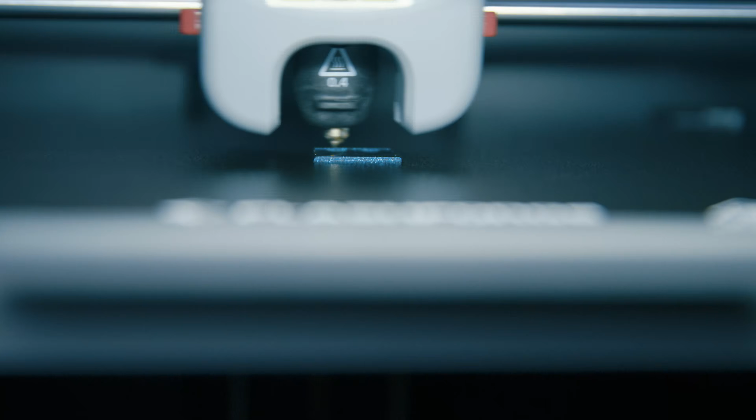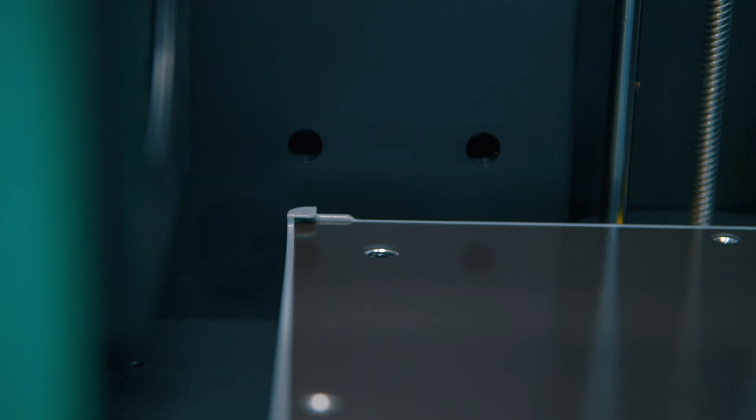It really is a great time to get into FDM printing, with all the brands releasing super fast and stable Core XY printers. The difficulty really is choosing between them, and within this size and form factor category. So if you'd already decided on maybe a P1P or a K1, let me muddy the waters further by asking you to consider a third option, because this one does some cool stuff and smart things to drive the technology forward.

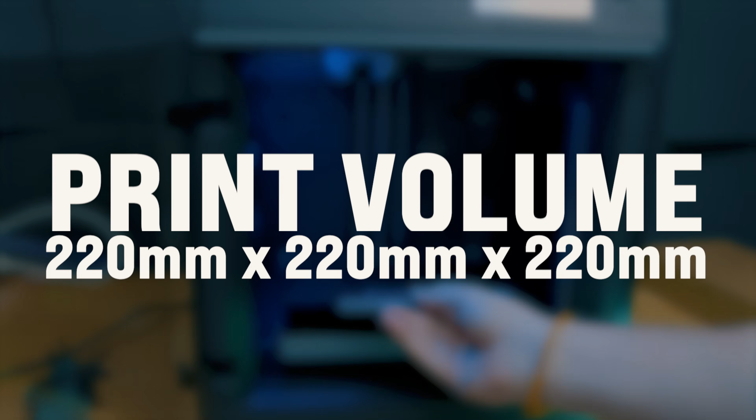Straight up, print-wise, this is solid once you get past the small hurdle, which I'll come onto shortly. But this is a really nice and tidy compact Core XY printer, and despite its size, it still has a 220mm cubed print volume, which comparably is the same as the Creality K1 in build area and just 3cm shorter in build height. It's a minimal difference.

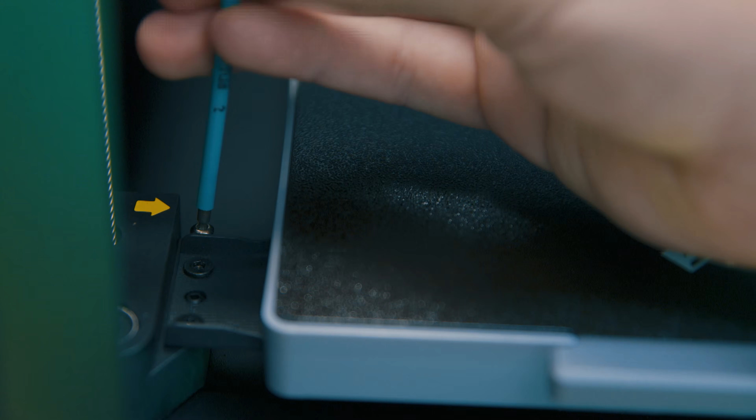Setup is simple, just take it out of the box, pull out the foam and undo the bolts securing the build plate. These are the ones with the bright yellow arrows pointing at them.

Now it's fast, but it's not the BS quick under 10-minute setup that they claim on the website, because even after all this and you turn it on, there's a 9-minute out of box calibration sequence. Though it's not like I can complain, considering I'm also guilty of misleading claims thanks to my clickbait thumbnails.

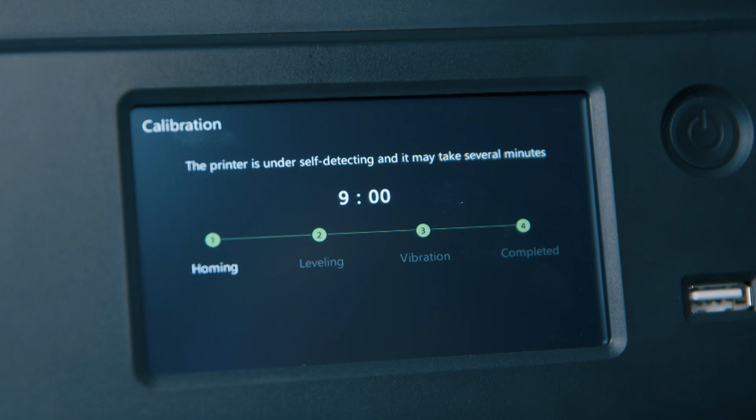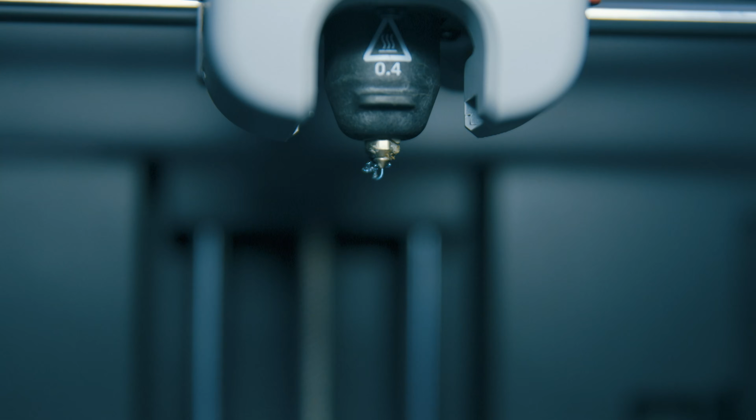Now in all honesty, the setup is pretty cool because it's straightforward and it does everything for you. Well, most of the important things anyway, such as leveling and vibration compensation. You just need to add the filament and you're ready to print.

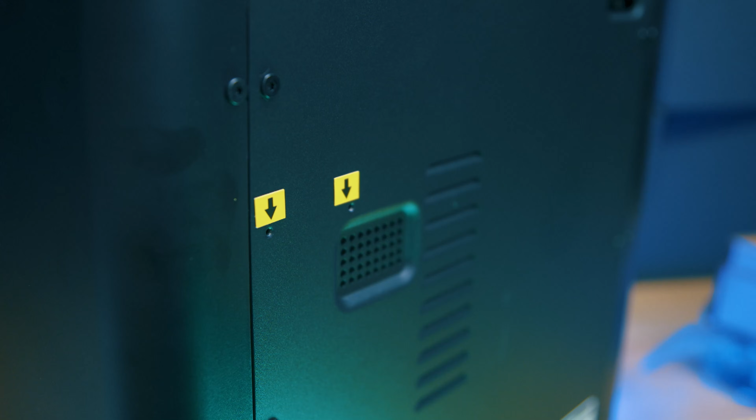And when it comes to filament, you get 250 grams with the printer, and they sent me this really nice titanium blue. I don't normally bother with the included filaments because they're too small, but this was too pretty not to use. Now when you load this in, Flashforge unfortunately have followed the irritating trend of having the spool holder on the back of the printer, and normally this means you need to have access to the back or spin the printer around every time you want to change it.

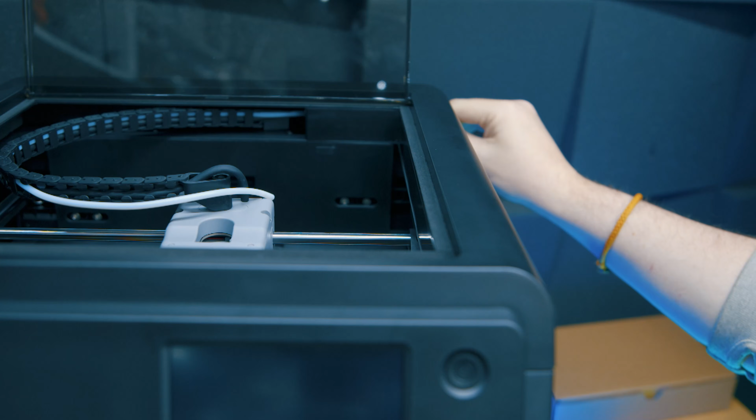But in this case they have left it so that the reel sits slightly proud at the rear and the PTFE tube sticks out of the edge, which means you can actually load filament into it with a generous reach around rather than having to go in from behind every time.

Other external features include the ports. You've got the power socket and rocker switch on the back, with the startup button next to the screen, that's sat on the front. And every time this starts up, because it kindly goes into sleep mode when it's not used for some time, you do get a funny little audio chime.

Also on the front next to the screen is the lone USB port, and I had hoped, thanks to the printer's rear Ethernet socket or built-in Wi-Fi capability, that I wouldn't need to use this, but I'll get onto that in a minute.

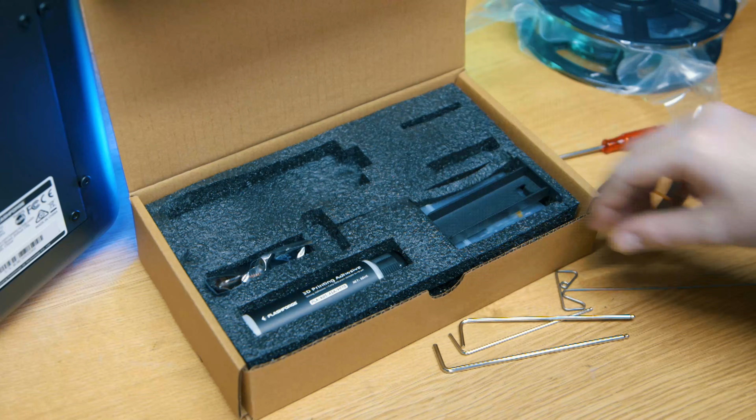Like all printers, this comes with a box of extras, which includes a set of Allen keys, a pokey stick, and you get a 0.6mm nozzle. You get a glue stick and some grease for the 3 Z-axis lead screws. And for the USB drive, I actually got a decent SanDisk one too.

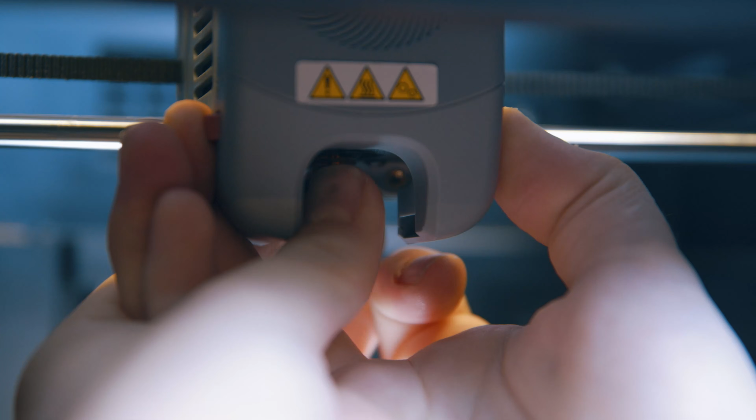Now, where Flashforge is moving the technology forward is with this nozzle. It is proprietary to Flashforge, but the benefit is that they've implemented a quick release system, and I have no issue paying a brand for proprietary replacement parts when they add a feature like this, because it is as simple as pull the big red release latches, pull one nozzle out and put another one in. Just make sure you only do this when the nozzle's cold.

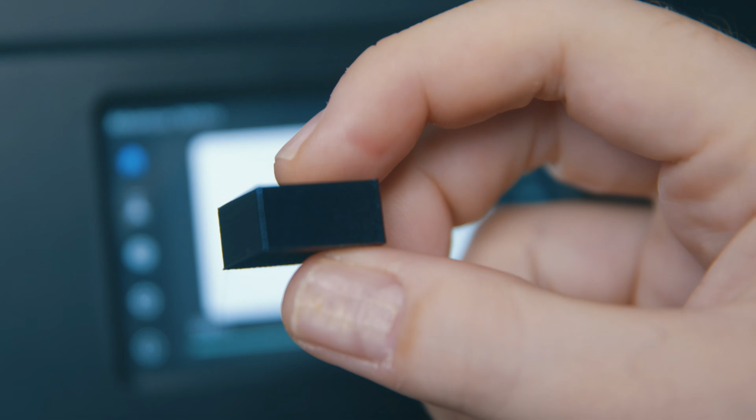Now you do get a 0.4 in the printer by default and a 0.6 separately in the box, but a 0.8 and a 0.25 nozzle is available separately. After I did my initial test, which included a test block as part of the out-of-box experience, there was no way I could see you could skip this, and I did a follow-up fidget spinner, which is a test file on the USB drive. I decided to then swap to the 0.6 nozzle and, well, I haven't looked back.

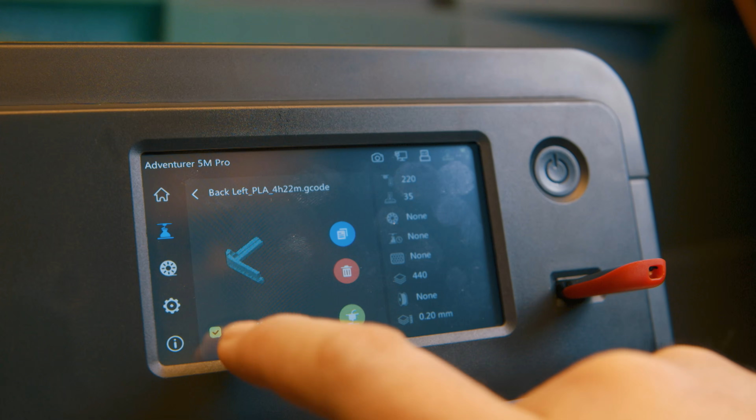The UI of the printer is very intuitive and clean, but you don't have a capacitive touchscreen, which basically means that some buttons require 2 or 3 presses to register because you haven't pressed it hard enough. This is especially true for buttons around the edges of the display.

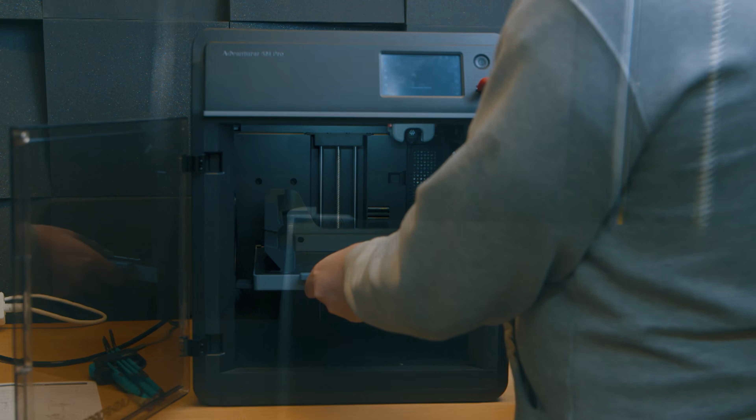Now the one gripe I mentioned in the intro is bed adherence. This printer comes with a 2-sided textured PEI plate, and they've been smart by adding 2 notches at the back of the heat bed, allowing you to guide it into place easily. The plastic handle on the front also helps prevent burns when lifting it out while still hot after a print. I do find it unfortunate though that there's no smooth plate option despite the plate looking smooth on the website. This is just a personal preference of mine that I've come to love from other brands.

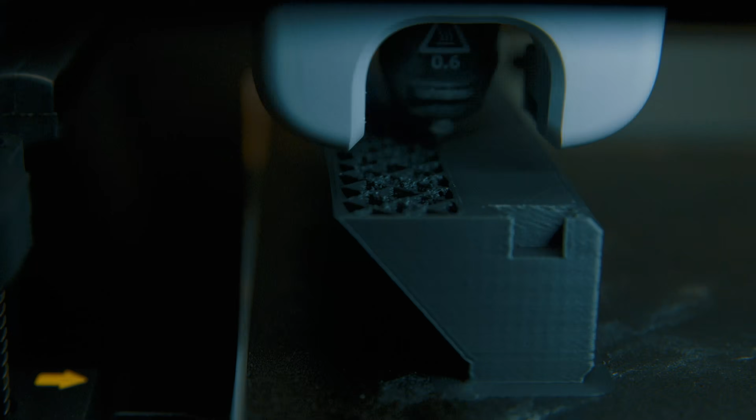But anyway, the problem I had is that I couldn't get anything to stick to the platform after the 2 initial test prints, even when using the included glue stick as an interface. It was only after I swapped to a thicker and stronger glue stick that anything started to be more successful. I'm not sure what the issue was because I've used this type of plate before without issue, and the initial layers were certainly squishy enough for successful adhesion. But anyway, they do recommend glue stick, and once I found a decent one, this did work just fine.

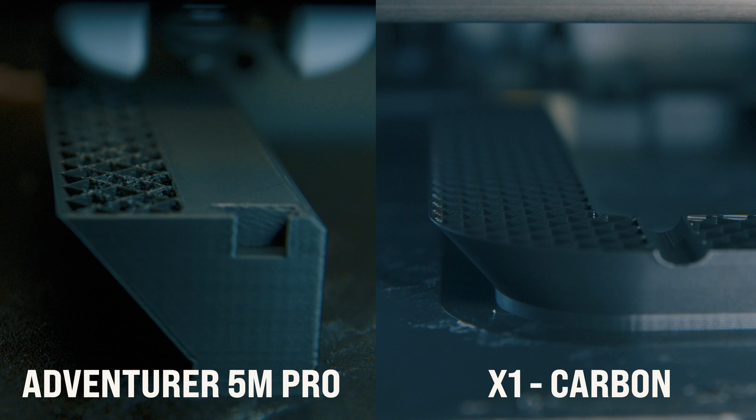The largest print I had off this was using the 0.6mm nozzle, and it was actually to create half of a dual AMS riser for my X1 Carbon. This showed me that the print result was easily on par with that much more expensive printer, which I used to print the other half. The other thing I created was a new storage case for all of my Switch games, and once again, no issues. Honestly, for practical prints, I'm considering swapping away from 0.4mm nozzles altogether, because this 0.6 was significantly faster.

Now, a couple of the final features I want to talk about before we conclude are ventilation. Many of these enclosed printers have a removable lid, but what I like about the Flashforge is that this is hinged, which means I don't need to find somewhere in my room to put this component when printing soft materials like PLA. But I don't actually need to lift it either.

Flashforge actually have another feature which means you can just leave this closed. When printing PLA, the printer will dynamically vent hot air outside of the case, but when printing hotter materials like ABS, the printer will switch to keeping hot air inside of the unit. And that is a super smart design choice. I haven't seen anybody else implement this yet, and all of my prints were in PLA with the lid closed, and I had no issues whatsoever.

The other thing to consider though is the slicer. You get FlashPrint 5 on the USB stick, but when you open the slicing software instructions file, front and center they tell you to use Orca Slicer. There's 4 pages on this versus the 1 on FlashPrint. So following that, I actually didn't bother with FlashPrint, and since I love Orca anyway, I just went with that.

But, and this is where I said I'll come back to that later, the one issue with Orca is that Wi-Fi functionality with this printer does not currently work. I reached out to Flashforge for guidance, but they advised it doesn't currently work, though they are working on it. I did follow up by asking them what the rough ETA is - weeks, months, years, never - but they refused to give me any estimate at all.

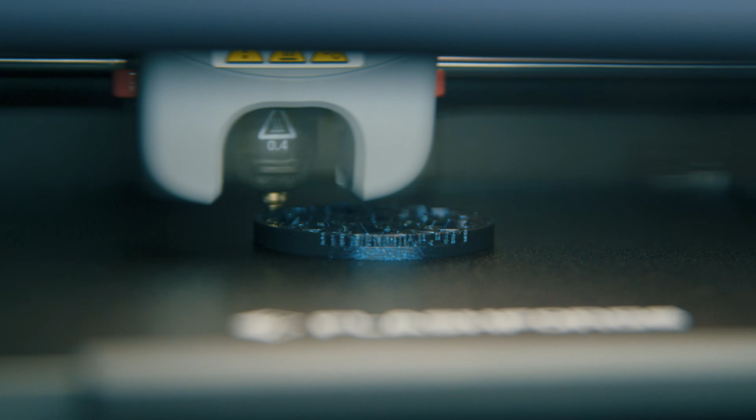And whilst talking to them, I also asked what firmware the printer runs on. Not that it matters to me, but people seem to like it nowadays when printers run on Klipper. Their response was: 'We appreciate your inquiry about the firmware used in our AD5 series products. However, due to considerations of commercial confidentiality and competitive strategy, we regret that we are unable to publicly disclose this information at this time.' When I followed up by asking, 'Can you just tell me if it's Klipper or not?', they reiterated that they are currently unable to disclose the information and asked if I would kindly not mention it in the video.

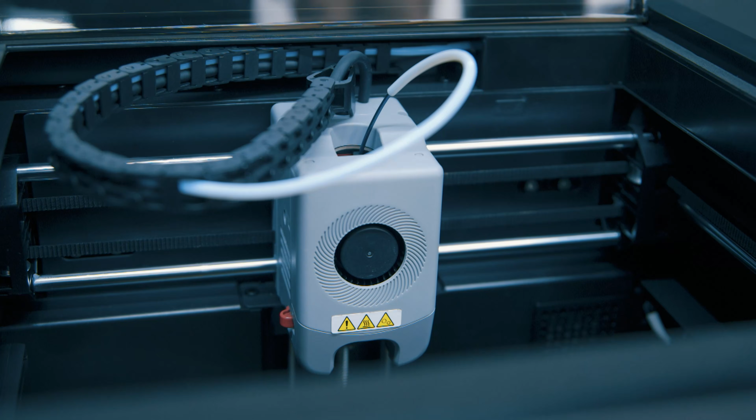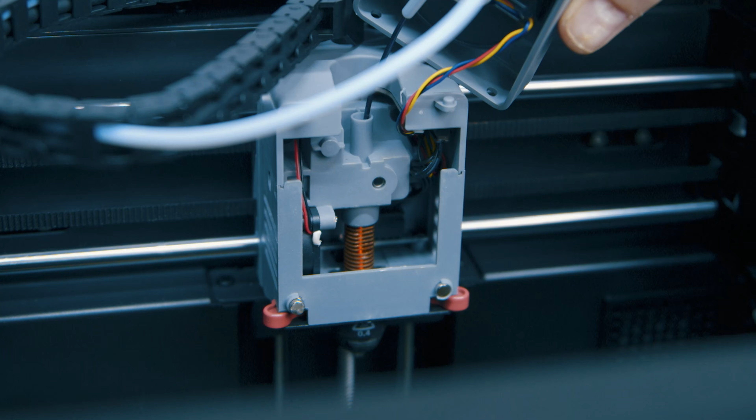Sorry guys, as I said in my reply, that's not how reviews work. Honestly, I just don't get it. Why the secrecy? Maybe I'm still naive to this level of detail on FDM printers, but surely you can just confirm if it's Klipper, Marlin, or proprietary. The people who want to know this as a key point won't buy your printer unless they know either way. If it's your own lockdown software, even if based on another, just say it's proprietary and leave it at that. At least then I'd have something to tell people.

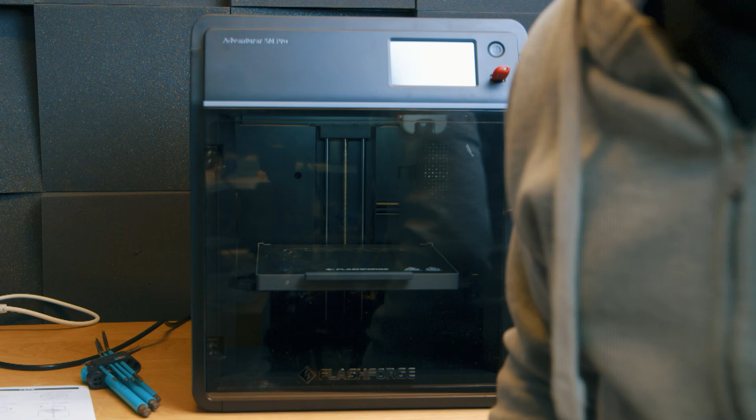Nowadays this lockdown secrecy attitude is likely to just put more people off, as is the lack of commitment to any target timeframe on the Wi-Fi function. Would it have been that hard to say we're trying to get it done by the end of the month, or we aim to get it done by the end of the quarter? If we get there and you don't, that's great, but at least tell us what your targets are so we can make an educated decision about buying your products now.

So when it comes to this printer, it's not the firmware I actually care about in this review, it's the attitude towards it. The printer works in the most part, and where it does, it works well, and that's what matters to me the most. So there's my two cents.

But I want to keep talking about what the printer has, and finally the one feature I didn't even realise this printer had is a built-in camera. This certainly is a popular feature on most modern printers, but this is currently very limited to creating time lapses, and very low, poor quality time lapses at that.

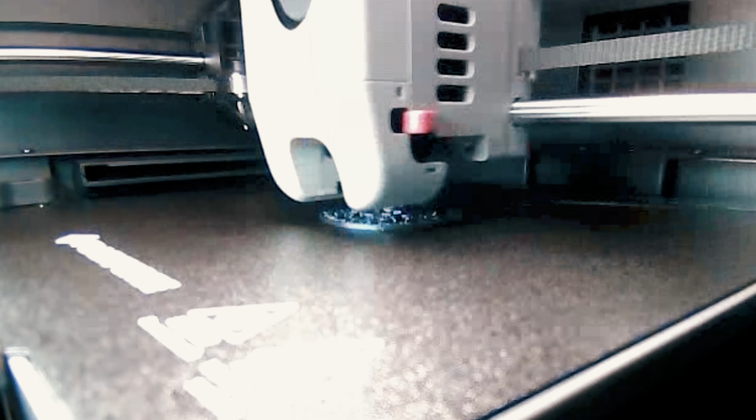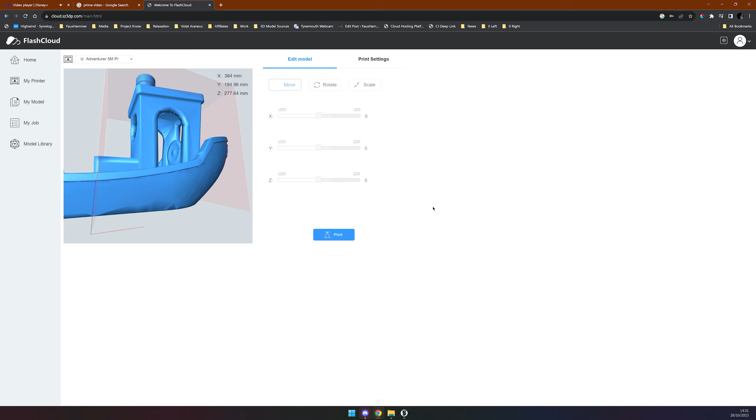Due to the lack of a functional network connection, there's no remote monitoring function that I could see, and Flashforge have no app. They do have FlashCloud, which you can integrate the printer with, but this is just, well, it's terrible. Sorry guys, but it's very beta at best, with a limited selection of poor quality models and some awful slicing and print setup controls.

And if it matters to anyone out there, this printer integrates with Polar Cloud, which I just don't see the point of unless you're a school. Honestly though, even then it still doesn't look too great. Honestly, I'd say stay away from both of these platforms, because they take a great looking and solidly performing product like the Adventurer 5M Pro and really just cheapen the experience to the point where they should be embarrassing for the brand when compared to the competition.

So all in all, hardware wise this is a solid printer, out of the box performance is great, and features like the quick change hot end and the dynamic chamber venting do make this stand out from the competition. But on the software side, they are lacking, and a quick look at their history suggests that quite a few users have had issues with them in this same area before.

When I tried to find out what firmware was on this printer, I quickly found previous complaints of Flashforge breaking features of earlier printers with firmware updates themselves, and they had no clear way to downgrade to earlier versions. So unfortunately, where this printer lacks is where Flashforge as a brand have always lacked, and they aren't carrying much favour or consumer trust in this area.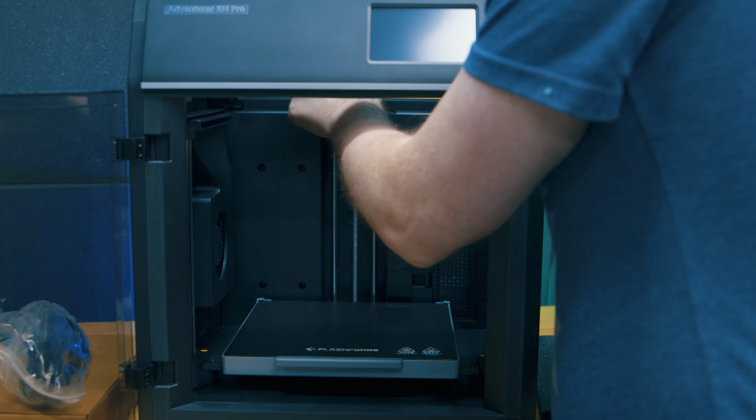So if you're after out of the box good printing, then yeah, grab one of these and be happy with it. But unless Flashforge realise that the true developments in FDM printing have come from the software side rather than just faster hardware, they'll continue to be a third-rate brand rather than the top tier they could be based on printers like this one they've just put out.